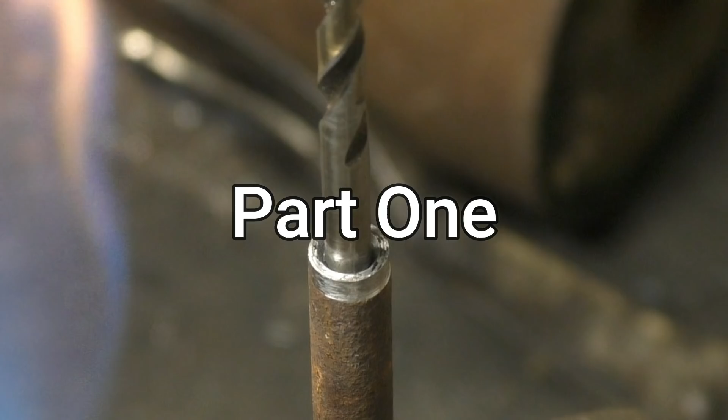I've got two broken manifold studs sticking out for a lad. Actually in a manifold flange, it's a steel flange and there's no access to it. I've got to make two long drills, otherwise it means dismantling half the car to get the manifold off.

The manifold studs are just 5/16, so I'm going to go through with a little pilot drill hopefully, then drill them out to 8.5 and I'll be able to put an 8mm nut and bolt through, because there is access to get your hand to the top. That's for the small one and that's for the big one. It's just whatever I had handy.

I have got some long drills, but I haven't got any long enough, so we'll make these two, and then I'll probably try and take the camera over to the lad's garage and do a little bit of video of them coming out.

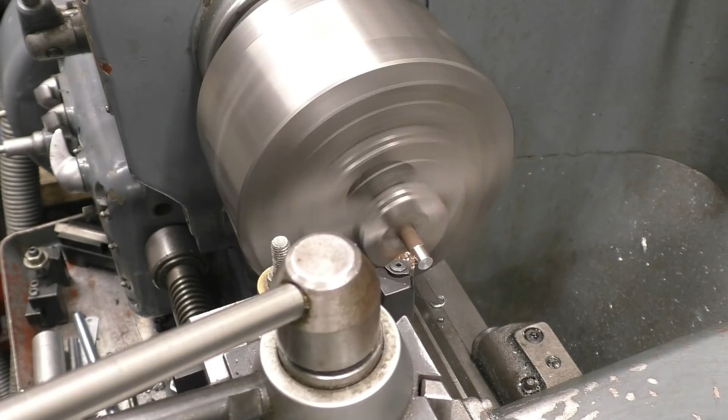I've got no idea what this is, it doesn't make any difference, it's just as long as I can drill it and braze it, it'll be alright. Just clean it up so it'll grip with the chuck quite nicely.

Got it nice and deep with the centre drill, and that'll leave a nice little well to hold a little bit extra brazing material. It's a nice sharp cobalt drill. So that drill's going to go into there like that, and then braze around there.

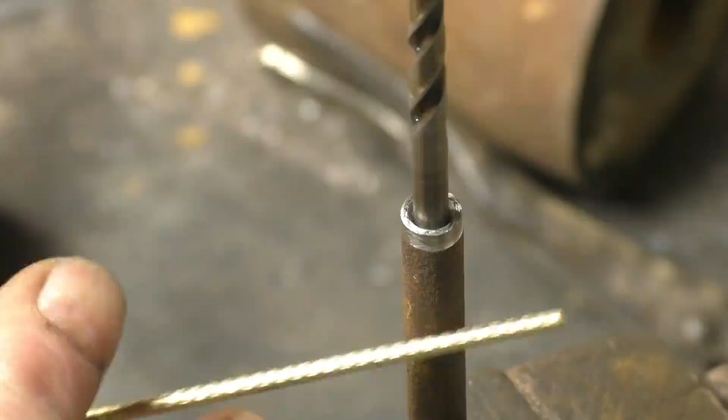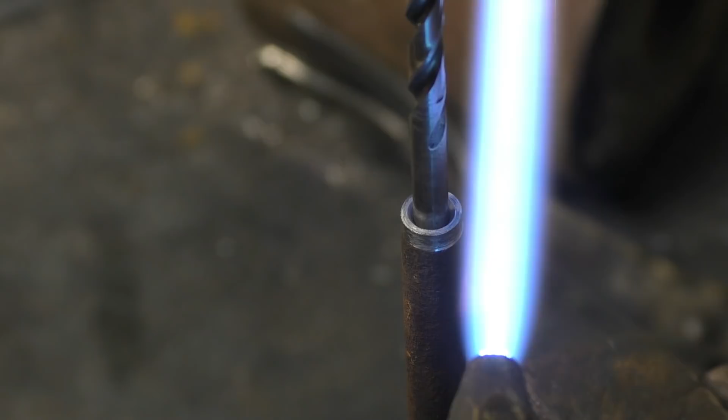I've been given some flux impregnated brazing rods, so I'm going to try using these. I normally use silver solder and separate flux, but I'll give these a try and see what happens. Melting point's a lot higher than silver solder, and still, I don't like it. Don't like that very much. I'll try what I normally use.

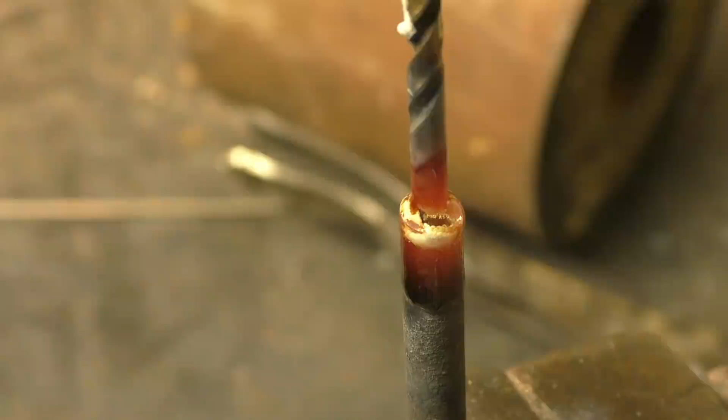Right, that's as close as I can get with this new lens. That looks pretty good. Basically all I've been doing this week is playing with this macro lens I've got, just to try different things.

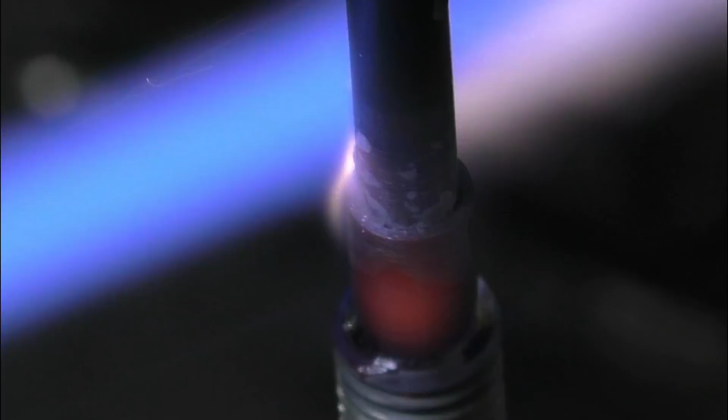I'm not putting any wet flux in the hole, because what normally happens when you do that is it creates steam and pops the drill out. So I'm just dipping the rod in the powdered flux. Right, that ran round there beautifully. That's the way it's supposed to work.

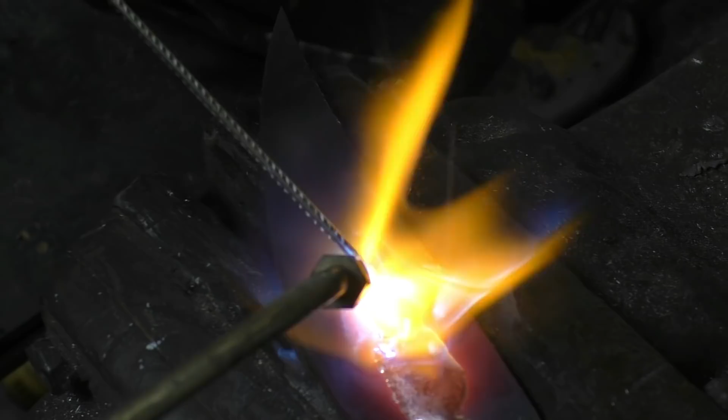I'm just going to try this flux cored rod on a little bit of steel plate just to see what's actually going on with it. It's certainly going in there alright. It'll be good for a job like repairing the body or a sump. You can fill a hole in with it. I've got quite a few of them, so it would be a shame not to put them to some sort of use. And that's on top of the mill scale on the plate. I have got a use.

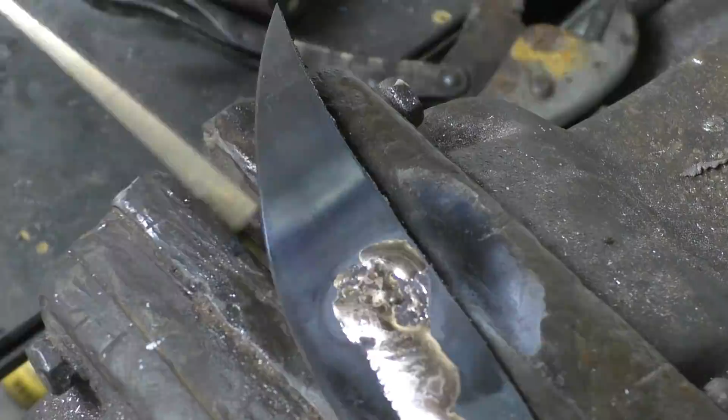There's a silicon bronze rod lying on the bench here, TIG brazing rod. I'm going to try running some of that in. I've not actually used that with gas, just to see what happens. I'll need to use a little bit of flux on it. With TIG brazing, you don't use any flux.

TIG brazing rods are made out of, I think it's copper and tin, where your brazing rods are copper and zinc. This melts at a higher temperature, and it's not designed for doing that. It's nowhere near as fluid as a brass. It's designed for TIG brazing. I've got an ordinary old-fashioned solid brazing rod. I might as well give that a try while I'm here.

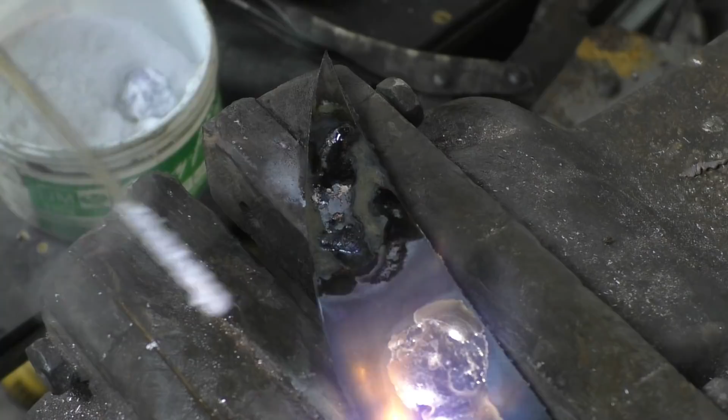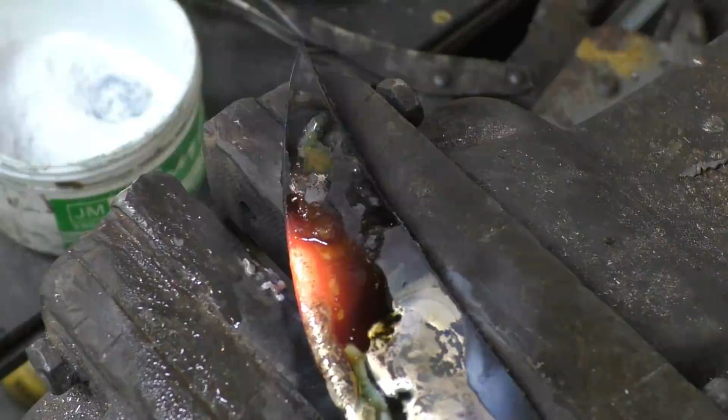Little bit of flux and then it's right on the edge of this. And that's more controllable than the flux impregnated rod. That's proper old school. That's quite nice, that. But the edges have been only raising like that. And the heat source I'm using is oxypropane.